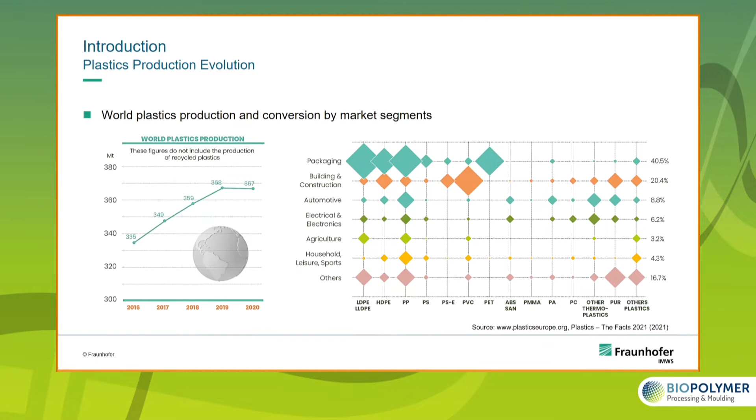So what is the actual situation? On the left side, you can see the plastics production over the last years. And here you can see the trend which was ongoing since many decades. So plastics production had a strong increase since many, many years and went up to a maximum of 368 million tons in the year 2019. In the last year, due to the pandemic situation, however, we had a small decrease, but the increase will go on. The world population is still growing, and therefore the production and the use of plastics will further increase.

What are the main market segments for plastics production? You can see that by far the biggest market segment is packaging. And in here, mainly polyethylene and polypropylene are used as materials. And those materials we want to replace by sustainable materials like biopolymers.

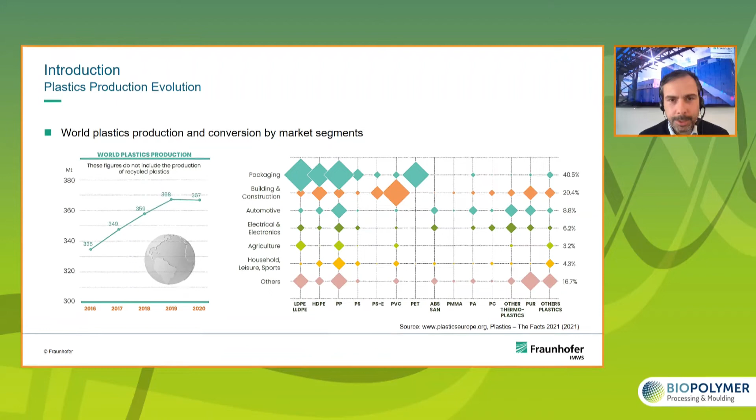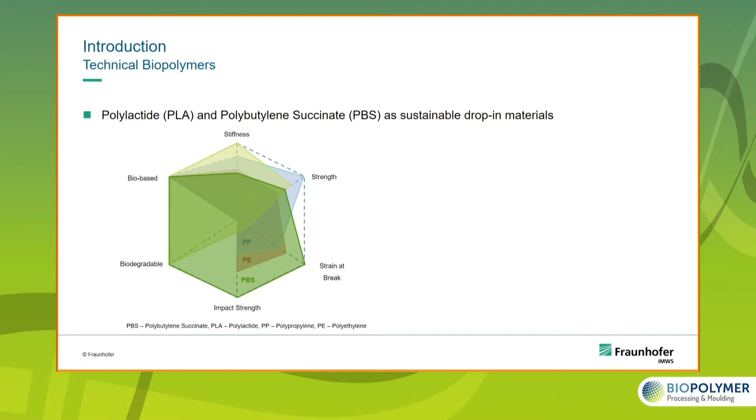However, there are other biopolymers entering the market right now, and one of the most interesting is PBS, polybutylene succinate. This material has very good ductility, so high strain at break and high impact strength, and is also bio-based and biodegradable. Especially in combination with PLA, there are many options to design and compound polymers and mixtures which can easily compete with polyethylene and polypropylene.

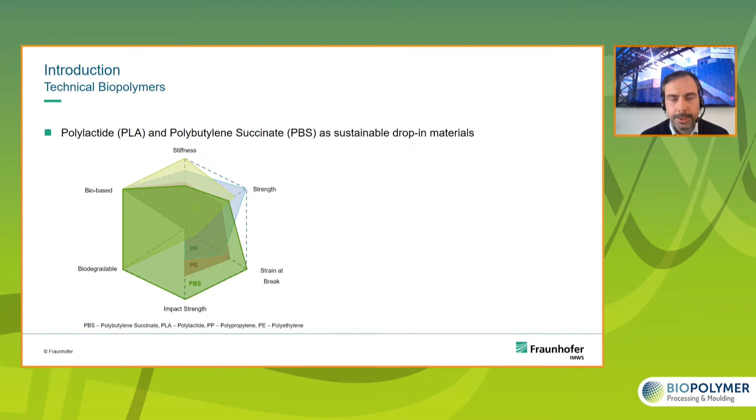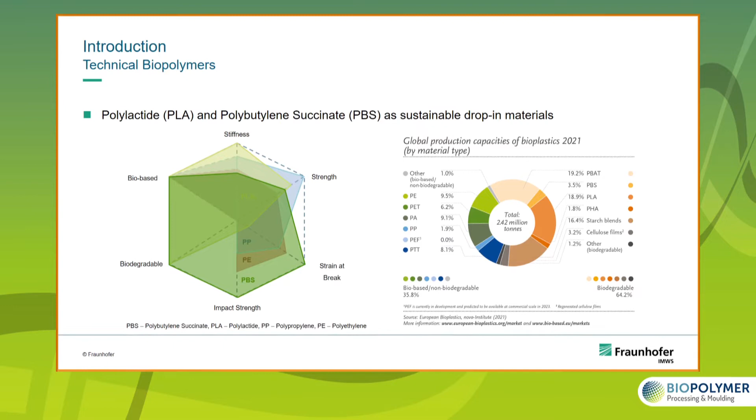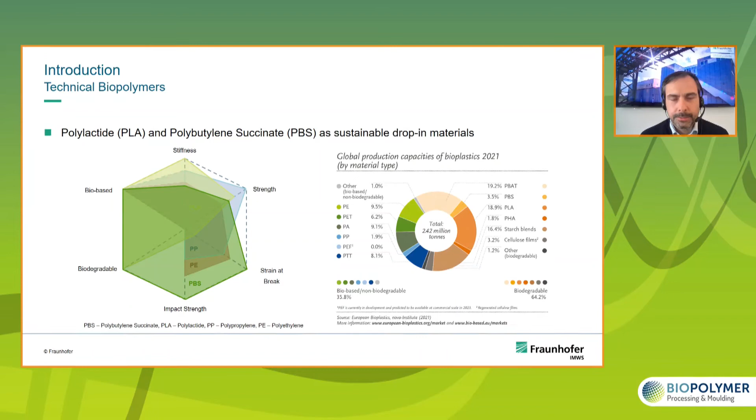Here are recent market data for bio-based and biodegradable polymers. You can see that especially for PLA and PBS, the shares are increasing. PLA actually has a share of 18.9% of the global biopolymer market within the range of biodegradable materials. PBS just has 3.5%, but this share will strongly increase in the future. As mentioned, those two materials are very interesting for replacing polyethylene and polypropylene.

So what are the tasks if you want to design or develop new polymers and compounds? At the beginning, you always have a requirement profile of your material where the needed mechanical properties, processing properties, and so on are listed. This gives the start for the optimization cycle you will enter. The first step is compounding, real mixing of new materials.

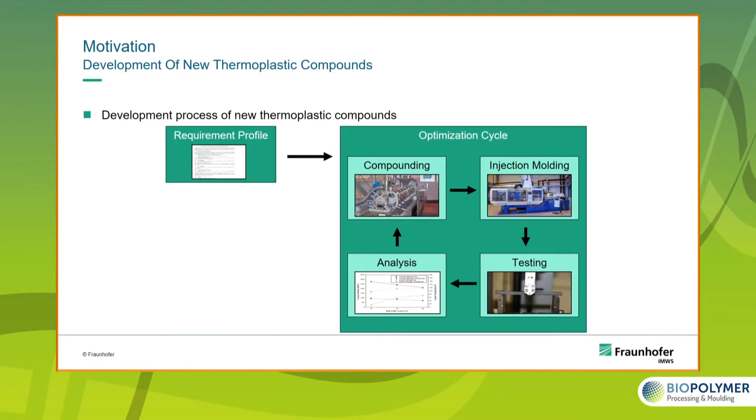The second step is production of test specimens, in most cases by injection molding. Later on, you will do testing, for example tensile testing, and those tests are then analyzed. If the requirements are met with the test results, you are done and you can leave this optimization cycle. If not, then you have to repeat the cycle as often as needed until you reach your required properties.

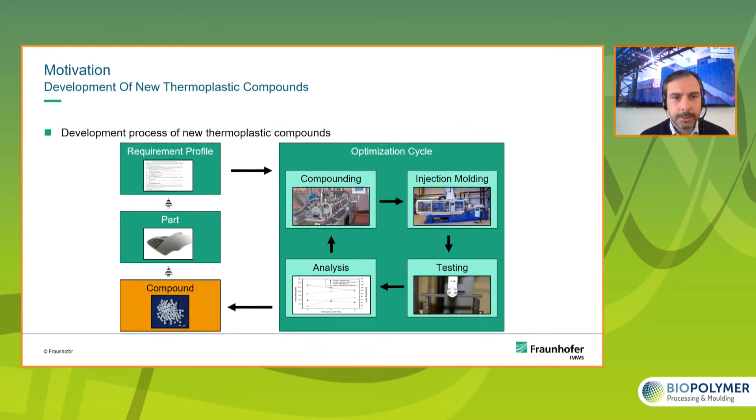In reality, this can end up in many, many experimental trials, and this is very cost and time consuming. However, at the end, you have your compound and you can produce your part. And if something changes with the part or with the requirement profile, you have to start the optimization cycle again.

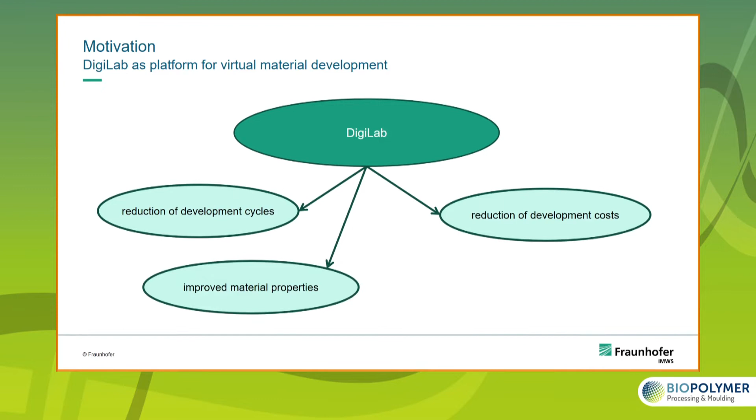We want to improve this by usage of virtual tools which help to faster develop new materials. We built up a platform for this, and this platform is called DigiLab. The major goals of DigiLab are reduction of development cycles, reduction of development costs, improved material properties, and improved material and process understanding.

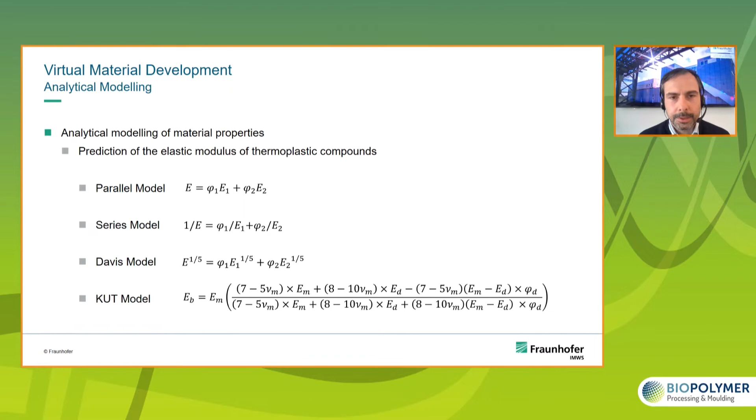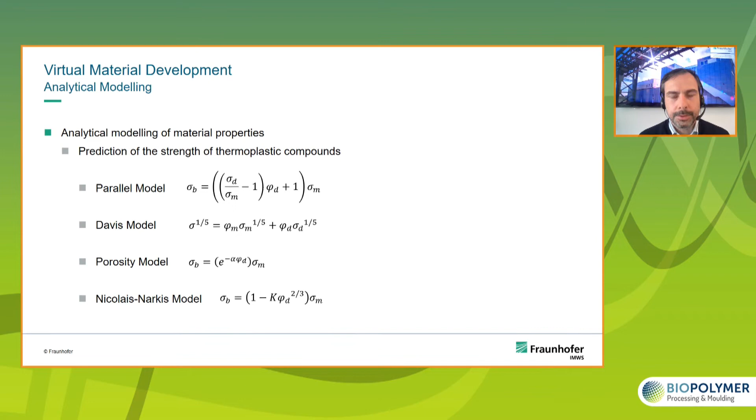The first tool we are using here are analytical models, meaning mathematical models to predict the properties of the materials. What you can see here are some of the models we use for prediction of the elastic modulus, so the stiffness of the materials, and here some of the models we use for prediction of the strength. All those models differ in their mathematical outline. However, the more complex your material, the more complex the mathematical formula you have to use to predict the properties of your material.

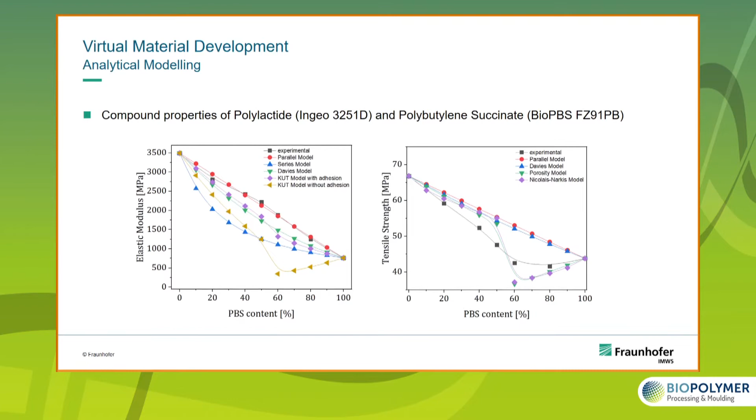On this slide, you can see our results on mathematical prediction of the stiffness and strength of a binary blend of polylactide and polybutylene succinate. You can see in the diagram on the left side that the stiffness of the blend goes down with increasing PBS content, and this is very well predicted by the parallel model. On the right side, you can see that the strength is also decreasing with increasing PBS content.

Here you can see that not the parallel model, but other models like the porosity model or the Nicolais-Narkis model are much better at predicting the slope of the experimental curve. This is due to the quite complex microstructure of this binary blend with increasing PBS content.

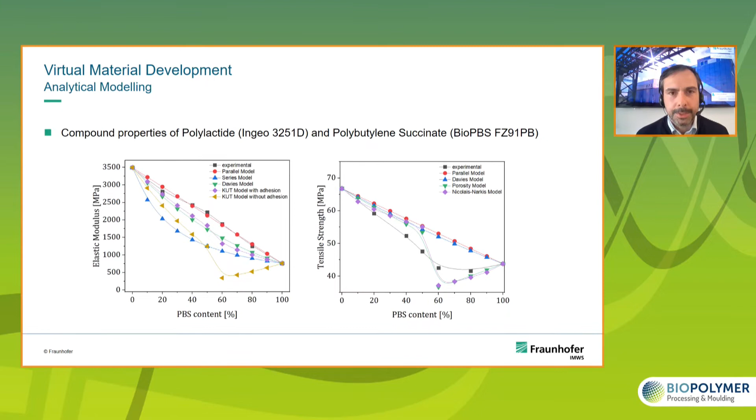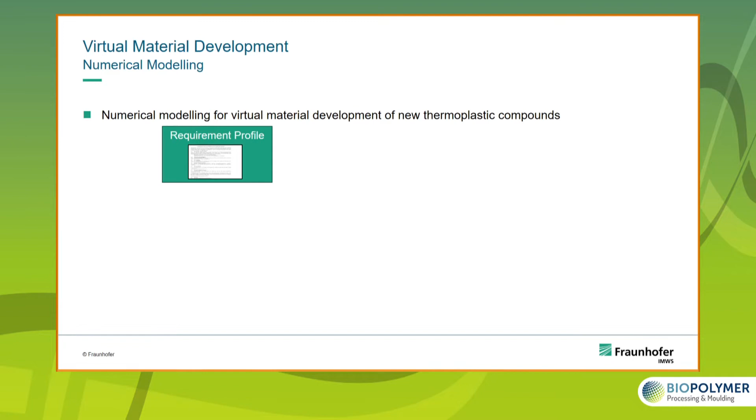So what else are we doing? What is very interesting as well is the usage of numerical modeling, because here you do not predict the properties of a bulk material itself, you can predict the behavior of an actual part. This is much more complex and much closer to the real application, and therefore we also use these kinds of tools.

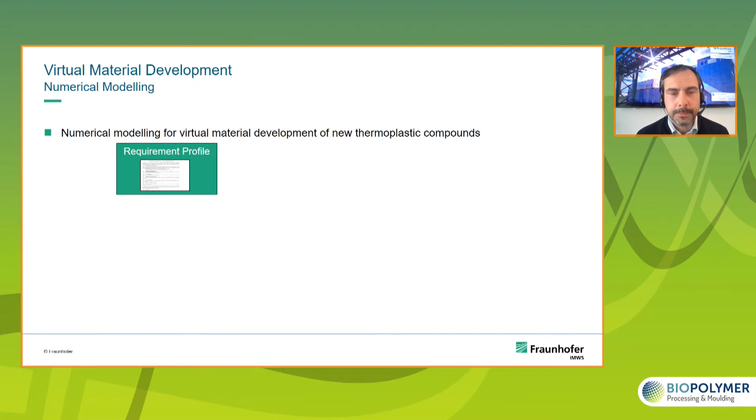What you also have here is a requirement profile at the beginning in which all the needed properties of the material and of the application are given. And then again you start an optimization cycle, but this optimization cycle is not experimental, but virtual. This means you run simulation programs which give you results on the different processes, and then you do virtual optimization.

In specific, we do compounding simulations. Those compounding simulations give us results we can use in the injection molding simulations, and from those injection molding simulations we can use the results for material modeling. If those virtual properties of the materials meet the requirement profile, we have a virtual compound. If not, then we have to redo the compounding simulation, injection molding simulation, and material modeling. However, at the end, you end up not with a real compound, but with a virtual compound.

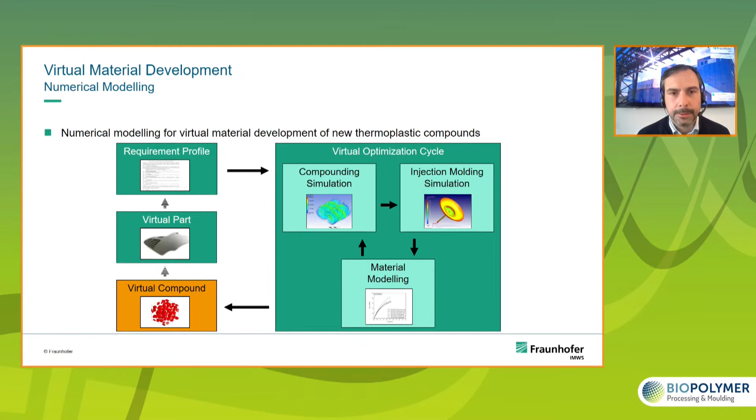And this can be used to design and to model a virtual part. And in here, we have much faster development than with the experimental trials. We have much less costs, and this brings a much faster development and reduction in time to market.

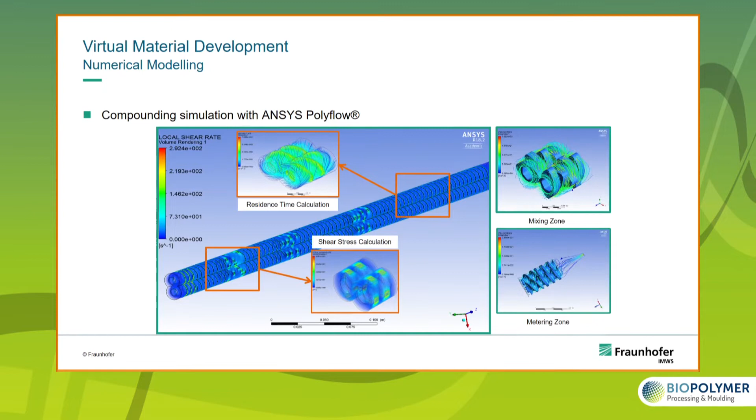In the compounding simulation, we work with the software ANSYS Polyflow. So this is a software where you can calculate the residence time, for example, as shown here, of a twin screw compounding machine. You can also simulate the shear stress over the screw. And especially in the mixing sections, this is very interesting because there you have the development of the microstructure of your compound. And this is very important to optimize properties at the end.

And of course, if you find out that the screw design you are actually working with virtually is not optimum, you can do virtual design optimizations. And this helps you to find the optimum design and process properties.

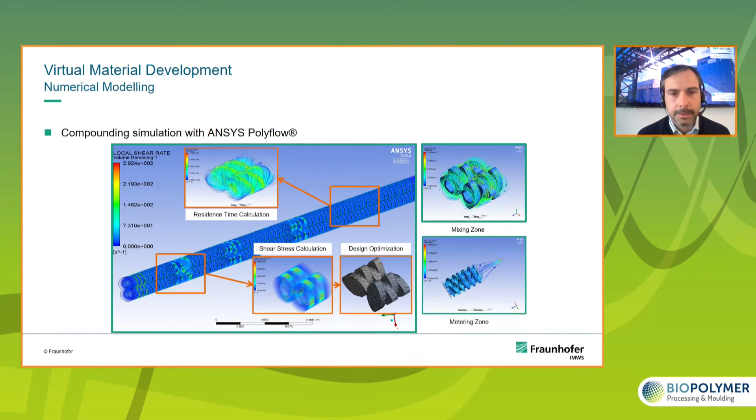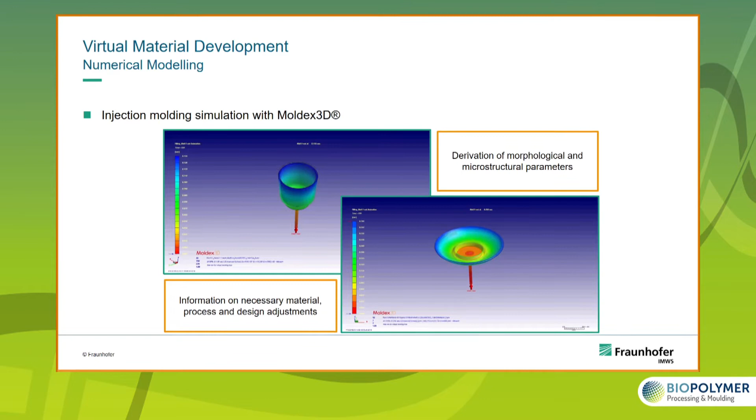In the injection molding simulation, we work with the software Moldex3D. And the same here, we can differ the material properties like viscosity or flow behavior. We can also differ the processing parameters. And by doing so, we can find optimum process setup and also find out how the material behaves under the processing.

And for us, this is very important because this is the final step in our optimization cycle, which can have influence on the microstructure of our materials. So derivation of morphological and microstructural parameters can happen. And this is very interesting for us to find out by those simulations. And in doing so, we find information on necessary material, process, and design adjustments.

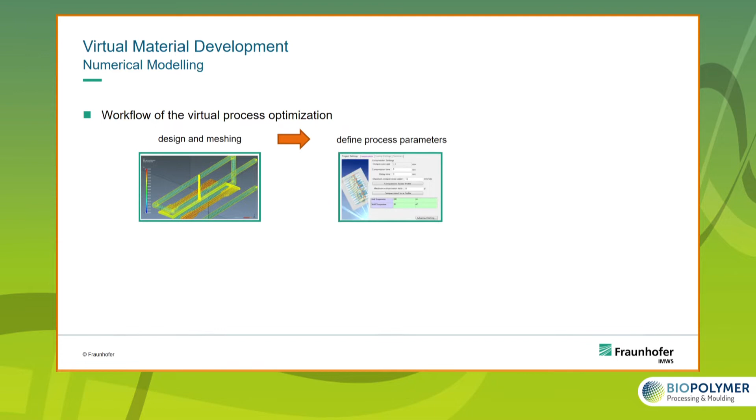So what is the general approach to optimize those processes and materials? At the first step, you have to do the design and meshing of your numerical model. In the second step, you have to define the process parameters of your virtual process. Afterwards, you must define the flow parameters during the injection molding in this case.

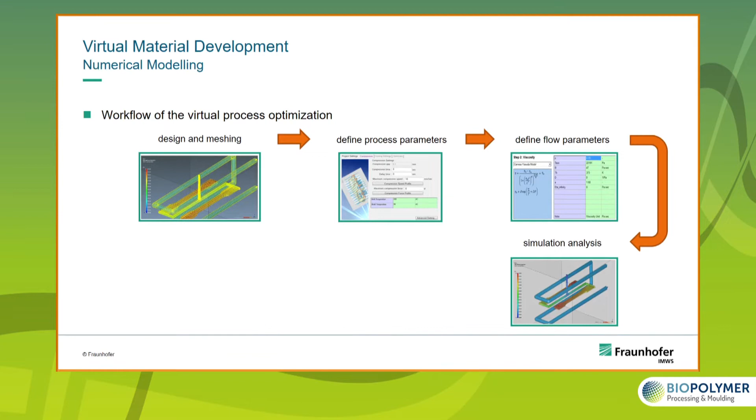And after the simulation is done, you have to analyze the simulation results in order to get all the information you want to have. In our case, this is the development of the microstructure. So we use a certain analysis, which is called Grace model analysis. And after the Grace model analysis, we can do the particle size prediction for those compounds or blends. And how this works, I will show you on the next slide.

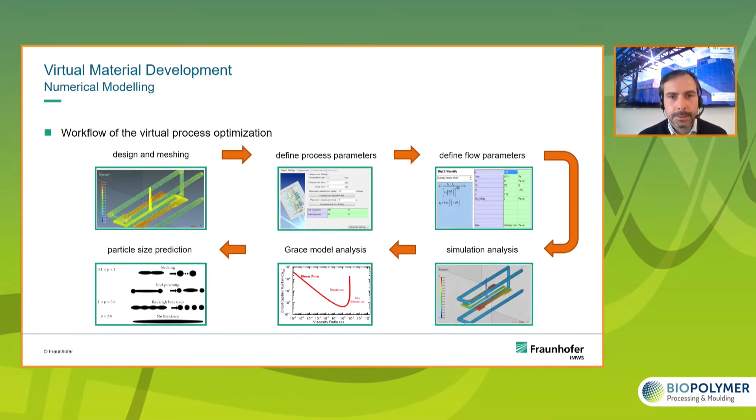So in here, you can see the Grace model and the capillary number, which is the key parameter in this model. So the capillary number is the product of the viscosity of the matrix of your compound and the applied shear rate during processing. And this is divided by the interfacial tension of your polymers. And whenever those two quotients meet each other, you have the so-called critical capillary number. This is the red line in the lower diagram on the left side.

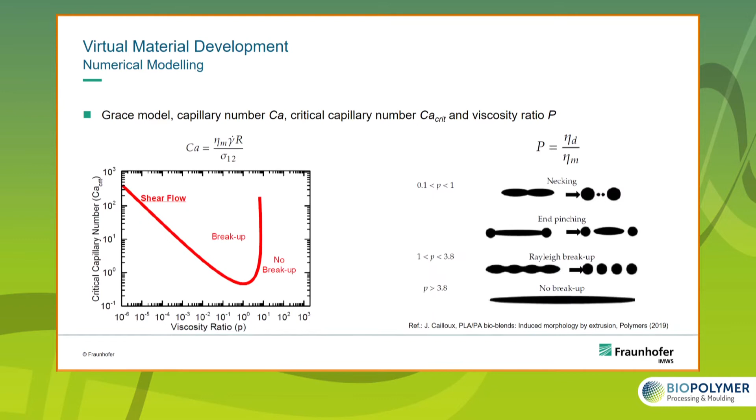And whenever the capillary number is bigger than this critical capillary number, you will have particle breakup, means you have a refinement of your microstructure, of your morphology. And this again is depending on the viscosity ratio of the polymers you are using. And what you can see here on the right side is what happens if we have different viscosity ratios of the matrix and the dispersed phase.

So if the viscosity ratio is close to 1, you will have this Rayleigh breakup, which is a deformation of droplets to fiber-like structures, and then the breakup to smaller droplets. If the viscosity ratio is smaller than 1, we have this necking effect. And if the viscosity ratio exceeds a factor of 3.8, experimentally, you won't find any breakup anymore, and you will stay with big particles.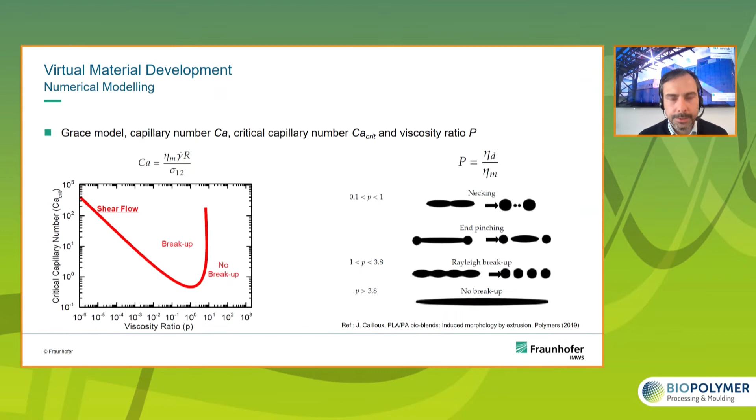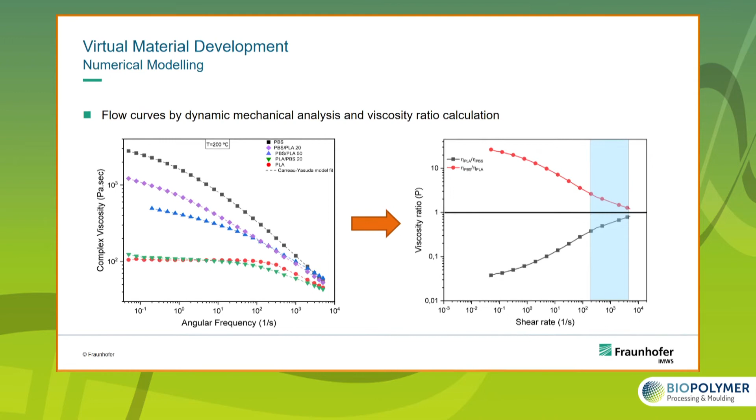We use these data to calculate the viscosity ratio of the two polymers, and this is shown on the right side. And here you can see that with increasing shear rate, the viscosity ratio comes close to 1. And if we remember one slide back, the particle breakup in this region of a viscosity ratio close to 1 is preferred in the necking mechanism.

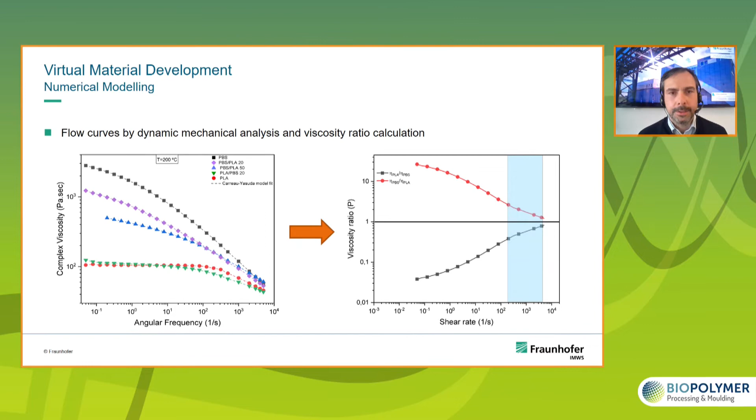And this is very interesting for us because during injection molding, you have very high shear rates. And this means that during this processing, we will have variation in the microstructure. And this was also shown in the experimental results.

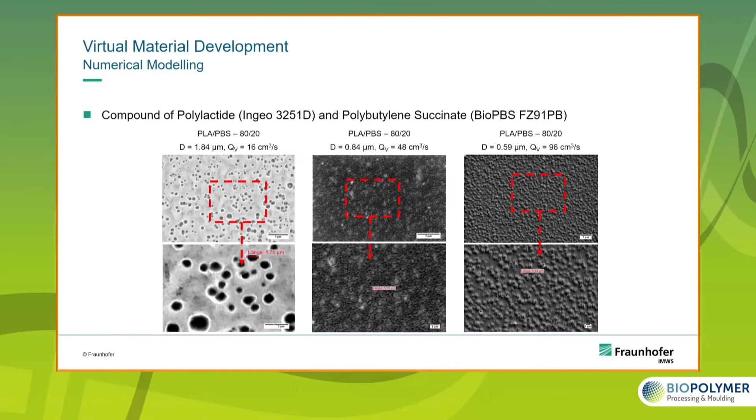So what you can see here is the pictures of the scanning electron microscopy of the microstructure of the blend of PLA and PBS with a composition of 80% PLA and 20% PBS. You can see on the left side the microstructure for a flow rate of 16 cubic centimeters per second, in the middle of 48 cubic centimeters per second, and on the right of 96 cubic centimeters per second.

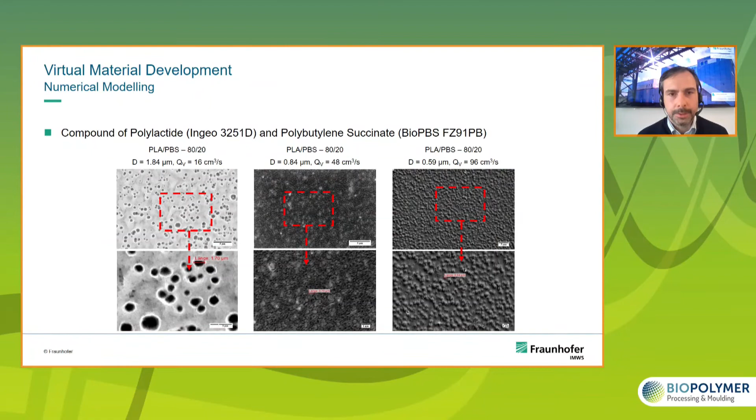And you can clearly see that with increasing flow rate, we have a decrease in the particle diameter. And for us, this is a very important information because this will clearly change the mechanical properties of our material. So based on these results, we did the capillary number calculation for our blend of PLA and PBS, and this is what you can see here.

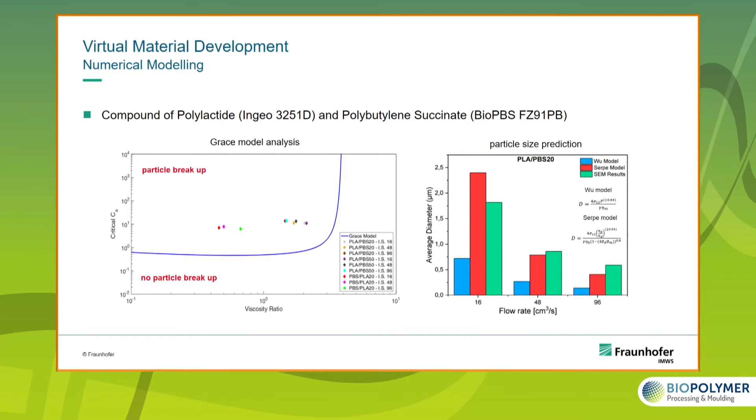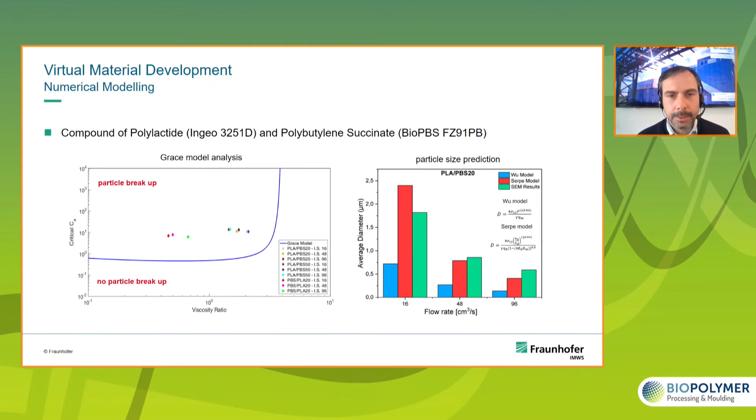To predict the final diameter of the microstructure, we used the Wu model and the Serpe model. And as you can see on the right side, the Serpe model was much closer in prediction of the diameter of the droplets than the Wu model, and this gives us certainty in the next step, which is the material modeling, meaning the real prediction of the final properties of our material.

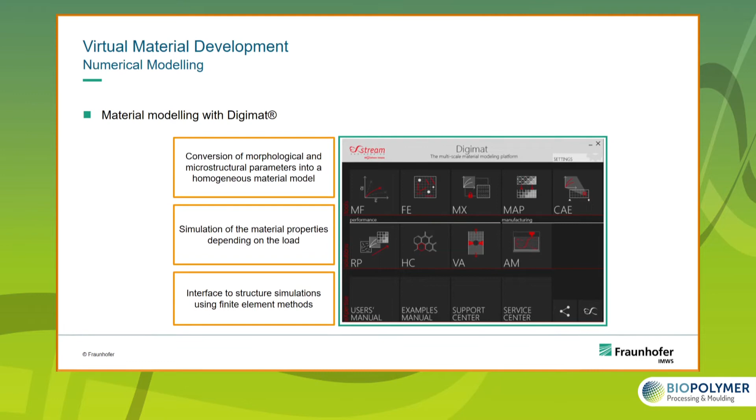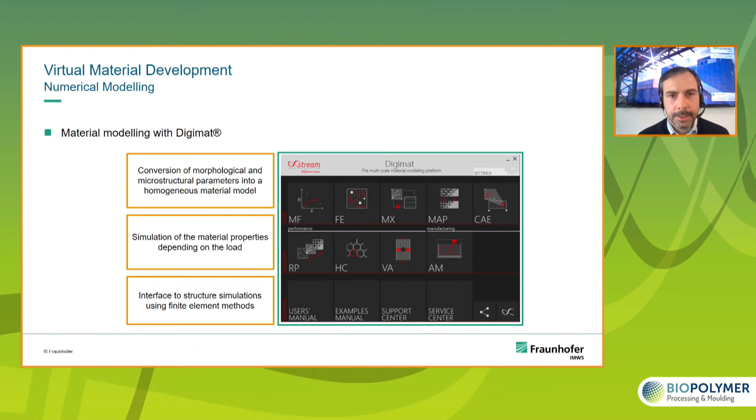This step is done with the software Digimat. In Digimat, you can define your own material, your own microstructure of your material, and then transform this into a material model, and finally predict material properties by numerical simulation. How this looks, you can see here.

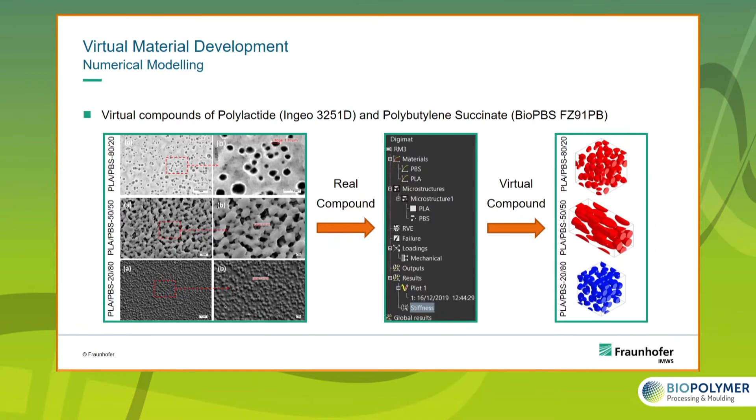So on the left side, you can see the microstructure again of our PBS PLA blends with different compositions. At the top, you see the blend with a composition of 80% PLA, 20% PBS, in the middle of 50% PLA, PBS, and at the bottom of 20% PLA and 80% PBS.

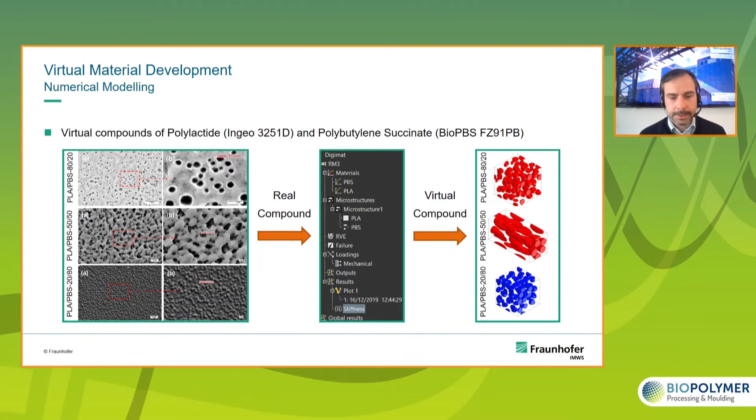This information was transported by numerical modeling into virtual compounds, meaning we created the virtual microstructures, which are shown on the right side. And for those materials, we did numerical simulation for the tensile test, and the results you can see here. So actually, we got very good overlapping of the predicted, meaning numerically simulated, material behavior and the experimental material behavior during the tensile test of our blends.

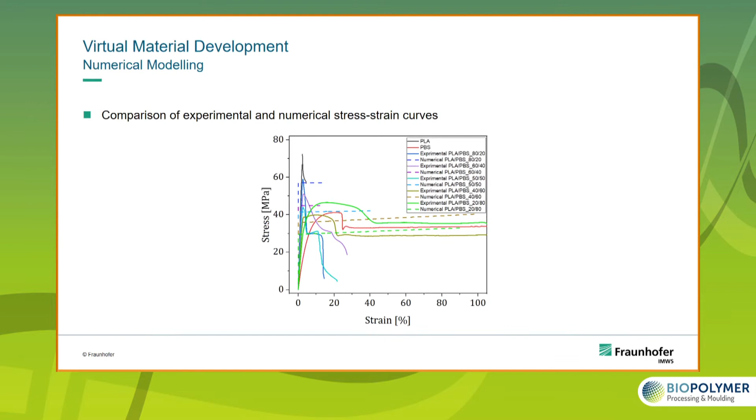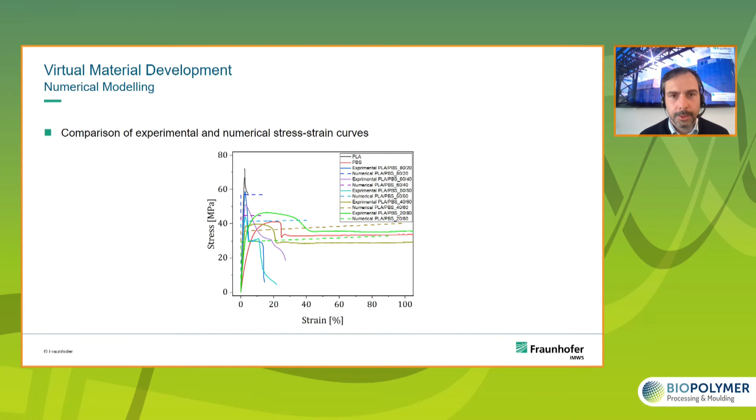And you can see that especially at lower strains, this is very well overlapping. At higher strains, the numerical simulation does not 100% overlap with the experimental results. This is something we will work on to optimize our material models and to optimize the prediction of the numerical simulations. So how can these results help you in the development of new materials?

The second tool is prediction of properties by analytical models. So we have implemented the analytical models here to predict the properties of blends and compounds, and this is what you can use online. And a new tool we are working on is a virtual reality environment for the development of new materials and also to adjust the color of those materials.

A fourth tool is the implementation of data import. So you can put your own data, the properties of your own compounds, into the database, and others can find those results. And so this is a free database for new materials, which you can use as a distribution platform. As I mentioned, this tool is a web app you can easily access with all kinds of mobile devices, and therefore have good connectivity to all of our customers and clients.

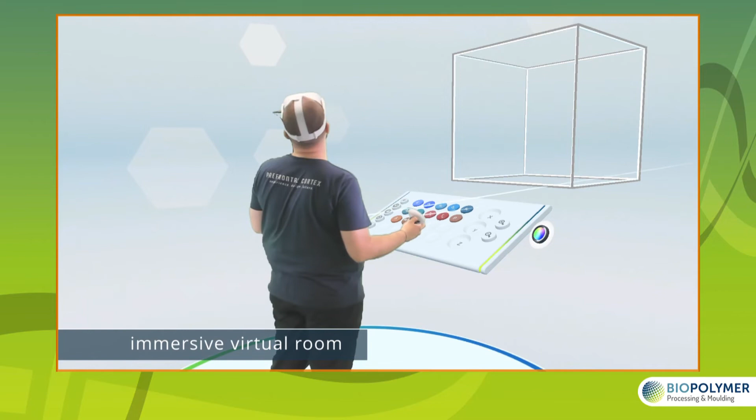So what I want to show you here is the latest results on our virtual reality environment. You can see that we created a complete immersive virtual room for development of new materials. This virtual room has two basic functions. The first basic function is that you can choose your own color by changing the LAB values of your material completely freely. What is also possible is that you choose already pre-designed colors designed by other customers, and therefore the development of new compounds with special coloring is also possible completely virtually.

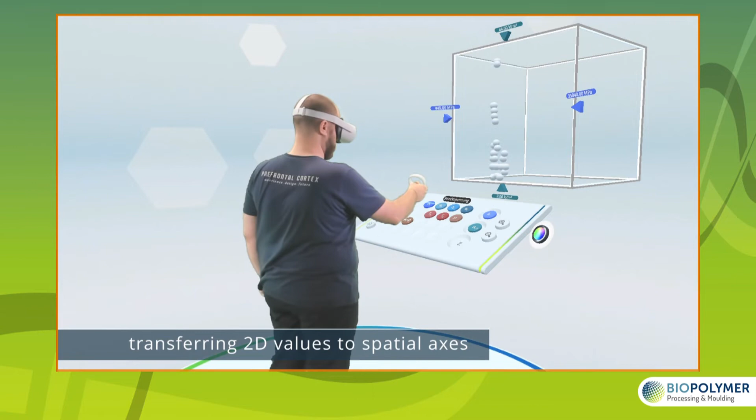The second function is the three-dimensional search in our database, and you can see that we have many different material properties which can be chosen as search parameters. For example, the stiffness or the elastic modulus, the strength of your material, and by doing so you create a three-dimensional room with all the database points.

You can see here, you can also choose if those points are selected, whether they are bio-based, non-bio-based, recycled or non-recycled. Based on those settings, you can define your own research room or research area. If you find your specific material which matches with your required properties, you can also check the microstructure of this. As we have seen in the previous slides, this is very important for the properties.

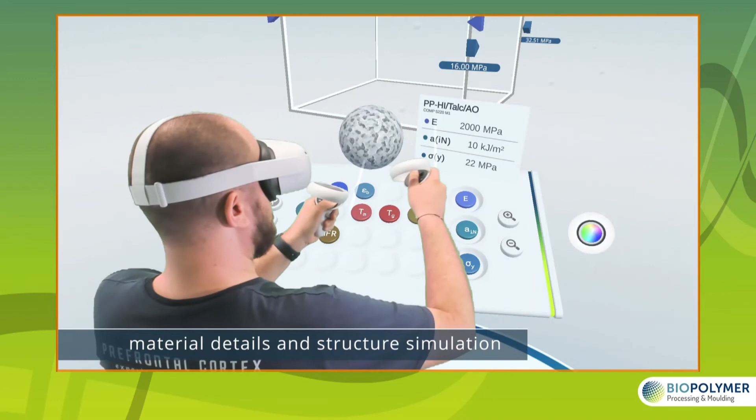This is a new function we implemented in our virtual reality tool. For each material, you can directly see the microstructure. I think I could show you that converting new biopolymers into competitive products requires efficient and resource-saving material development. We have created a virtual development platform called DigiLab for this, and in this we are working with analytical mathematical models, we are working with numerical simulations, and we are also using virtual reality tools.

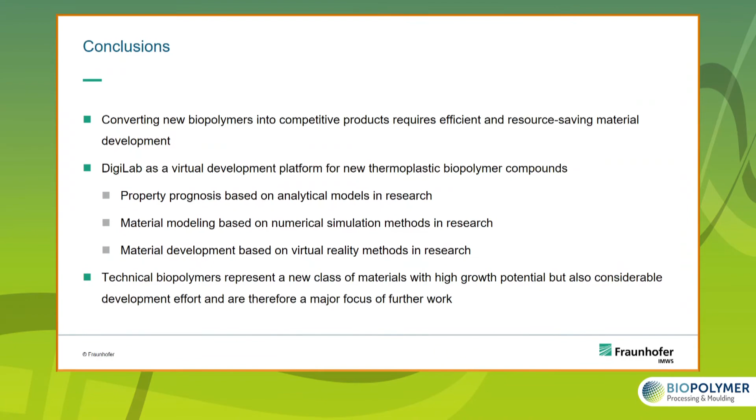And by doing so, we want to help biopolymers as new materials to enter the market very fast and to improve the sustainability of their products.